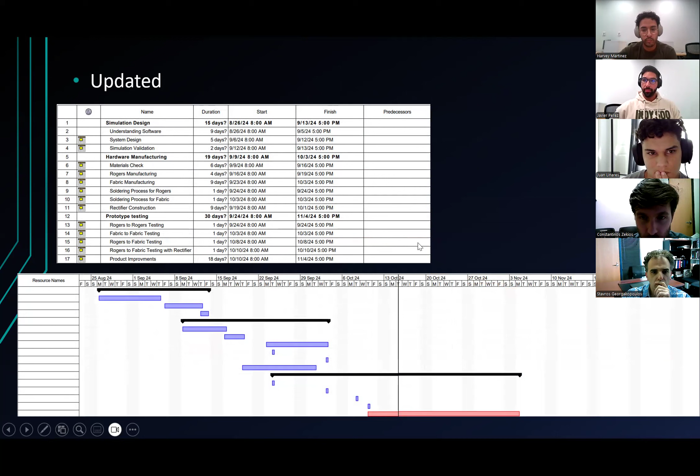Then the signal will be put through a rectifier to convert the power from AC to DC, and this will power our sensors, such as heartbeat sensors, atmospheric sensors, and things like this.

Our project cost currently stands around $178. With the changes of our products being used, we're not going to exceed the budget of $300.

Our initial budget was around $3,000, but with the materials provided and the changes in supplies, we were able to change that.

Now we're moving on to our individual contributions. This is Giovanni.

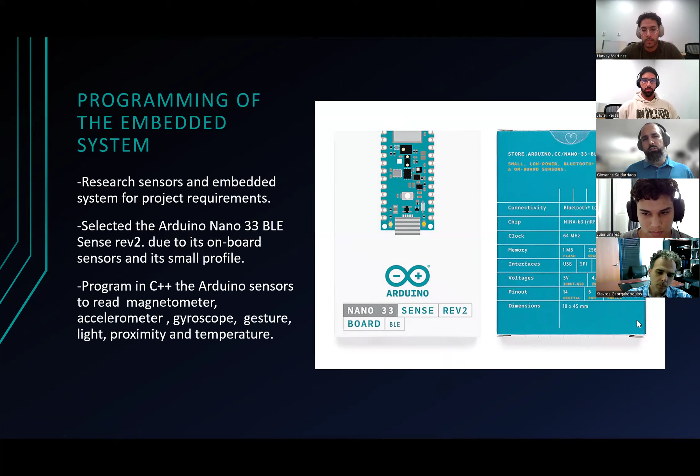I built a prototype on a breadboard. We went to the lab and used an oscilloscope to test it out to verify the 5 volts DC. After reviewing the results...

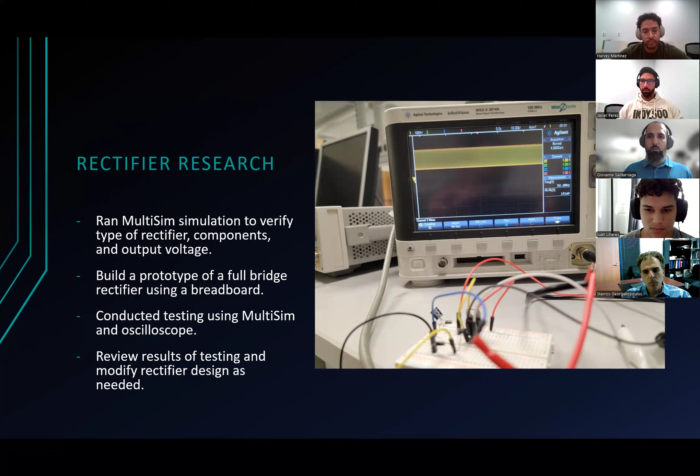Based on the results, we decided to add a higher capacitor to the rectifier to be able to deal with the higher frequency, which will be one of the challenges I'll be working on this week.

My next steps after that will be to solder it to a PCB board, integrate a heart monitor, and then hopefully build the GUI for it to communicate with the Arduino on a cell phone.

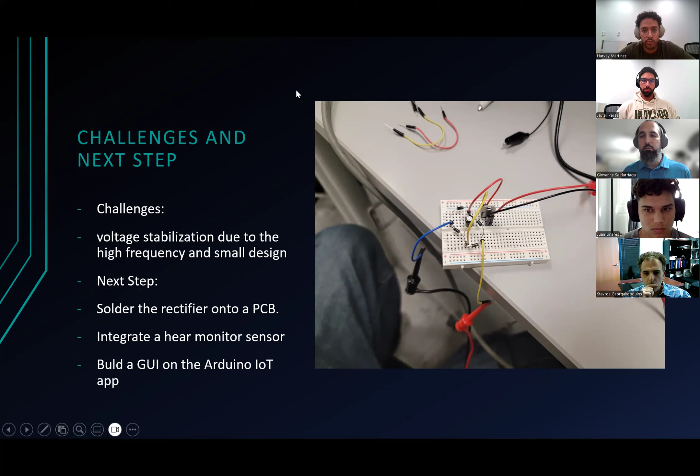All right, so I've been working on the design and simulation on ANSYS Electronic Desktop for the HFSS. I've been creating the design to the specifications. We've been using 1.5 millimeter Rogers, and we have 3 simulation files: Rogers to Rogers, Fabric to Fabric, and Rogers to Fabric.

We added a parametric sweep for the frequency and for the distance, from 2 millimeters to 50 millimeters, to see how that changes the S parameters. For the Rogers to Fabric, we got around 93% efficiency at 5 millimeters, which is good since our application is going to be wearable, it should be around that distance. The 5 to 10 millimeter range proved to be the best, which is good since it's a wearable.

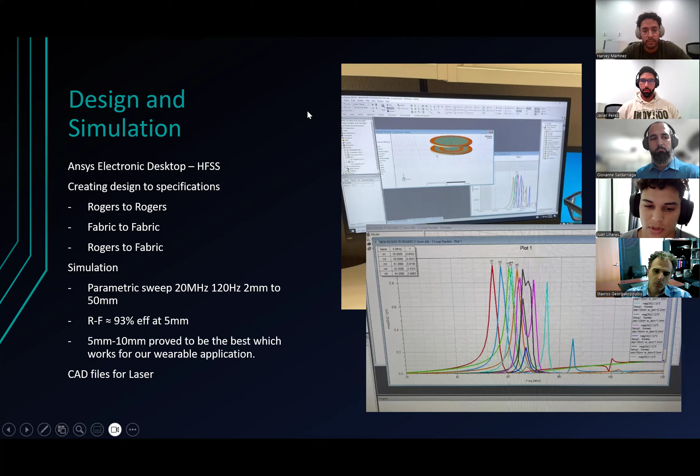And I've also been working on the CAD files for the laser fabrication.

My contribution was overseeing the manufacturing parts of the process. I was in charge of ordering and getting the physical Rogers material. I was also in charge of overseeing the manufacturing process with the laser, making sure everything goes smoothly, and also the initial testing.

We tested it, I believe it was on Tuesday. As you can see here with the pictures, we got an efficiency around 92%, variable depending. This is very good because this matches up with Juan's simulation, as he said earlier.

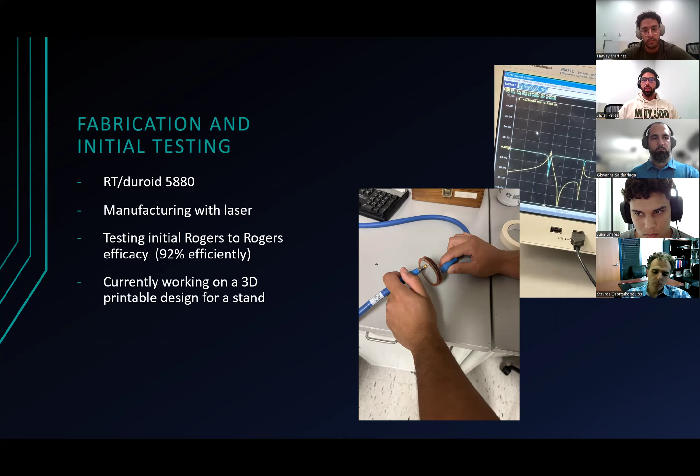Currently, my next step is designing a 3D printable stand. As you can see in the picture, we're holding it by hand, and this may cause interference with the frequency. So if we put the receiver and transmitter on a stand, it could lead to easier testing.

My primary contribution lies in developing a conductive textile pattern in AutoCAD, ensuring that the design matches the dimensions of the wireless transmitter, and that this design is also compatible with the Brother Innovis VM5100 embroidery machine.

In order to attain this compatibility, I have to make sure that the file is formatted to work with file extensions as PES or DST, which are the extensions that this machine recognizes. I also have to adjust the stitch count and density for machine efficiency and durability.

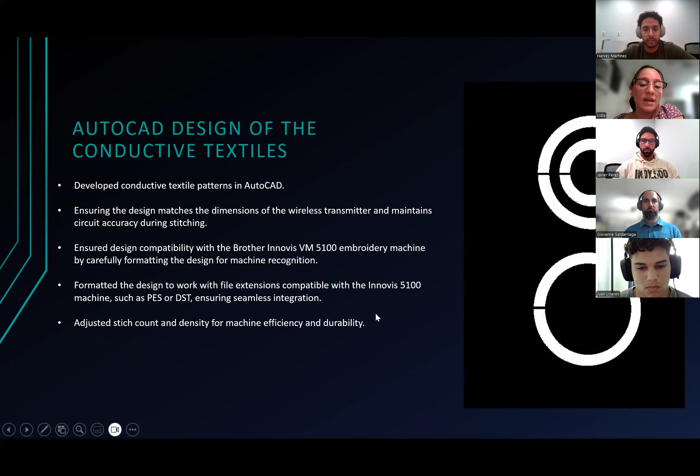These are the steps that we follow to convert the AutoCAD design to PES format. After the design is done in AutoCAD, we export it with the DXF extension, and then we import it into the FreeCAD software, which is going to convert this file into an SVG extension.

Following this step, we imported the file into Inkscape, which is going to finally convert the file into the PES extension, which is the one that we need to connect with the embroidery machine. Once we are in this software, Inkscape, we are able to make some adjustments in the stitch type and density with the extension of this software named InkStitch.

One of the challenges that we are having with this part of the project is that after following this step, usually the file comes with a high stitch count, causing issues with the machine recognizing the file.

The solution that we are going to implement is to reduce the stitch density and adjust the design layout in AutoCAD. For my final step, we are going to proceed to testing and evaluating the conductive fabric and report final findings to the project team.

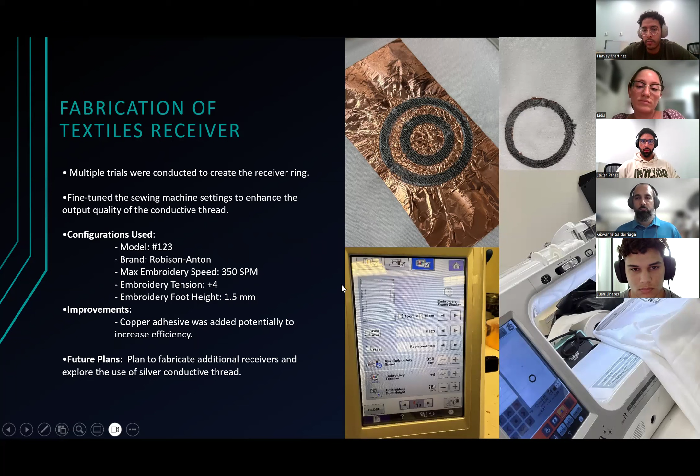With the copper adhesive and the conductive thread, we needed to change the configurations in the machine, such as Robison Anton, speed to 350, tension 4, and embroidery height to 1.5 millimeters. The improvement I added: I was going to just do the conductive thread on the receiver, but I decided to add the copper adhesive in between to see what potentials may lie when it comes to creating that.

Future plans at the moment: we're going to create additional receivers and explore the use of silver conductive thread. That is something I want to look into because silver does have a higher conductive efficiency when it comes to metals. What we're using now is a stainless steel conductive thread, but we'll continue looking into what other materials are out there for better efficiency on the textile thread.

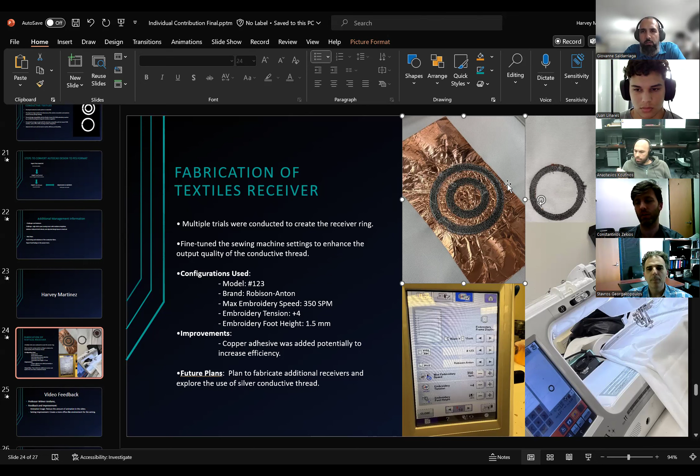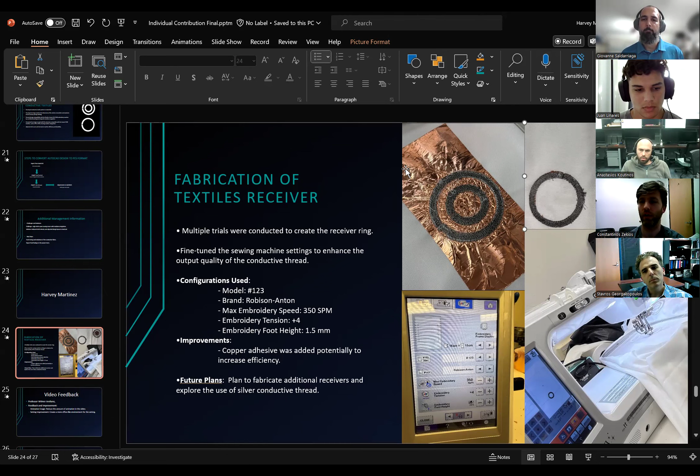You can use a different substrate underneath, and I like that you have copper on top of whatever it is because you can increase the efficiency, and it's still flexible so it won't break. But you need to put something underneath, like denim, as a support substrate, and remove all the copper between the loops. In the inner loop, you shouldn't have any copper, it should only be behind your ring.

But I think if they have copper really close to the elements, they're going to be detuned. I have a feeling it's going to go down. Have you tested that element?

So we haven't tested it yet, but I think you're gonna get 0 out of that. Even if you clear the area between, I think still you're gonna get very low because we've always had a problem.

These things, the moment you bring them close to ground... we even published one work where we were putting, if you want to help that situation, a ferrite material. The ferrite isolates the ground plane or the metal under the receiver. But if you just put it like that, very close, basically you short the coupling, and then your efficiency will go down to like 0.

But if you look at the one on the right, you see how it's like essentially one side with a single loop, and then the other side is the other side. There's gonna be like a piece of denim in the middle of that, and all the excess copper is gonna get taken out. Yeah, we don't want copper.

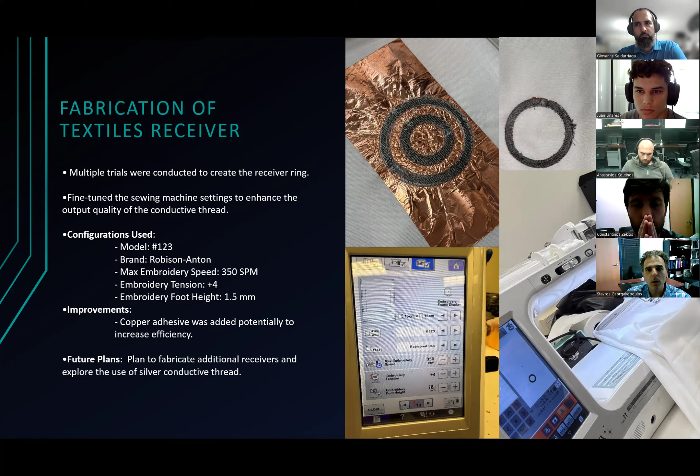The people doing the Arduino and circuit part can just go and try to see how much power this thing needs, what's the minimum power to turn it on. Then from that, you can do a simple back calculation. If you assume like 40% efficiency in your rectification, and 90% efficiency for the wireless link, then you figure out how much power you need to send. Once you tell us that number, we can figure out if it's easy or difficult to do.

I also saw a different part that's not Arduino, I think it's called Adafruit. They also have a part that can be used with conductive thread, we've used that stuff before. We were picking the lowest power possible, and from what I've seen, the Adafruit one has the lowest power. So we'll see how we would switch gears from the Arduino to the Adafruit.

And it's good to keep us posted, so keep us updated. Once you find that, you can tell us quickly, so you don't go down a path doing everything with the Arduino and then a month from now we figure out we can't generate this power. So it's better to figure that out quickly because it's going to be a critical part of the design for it to work.